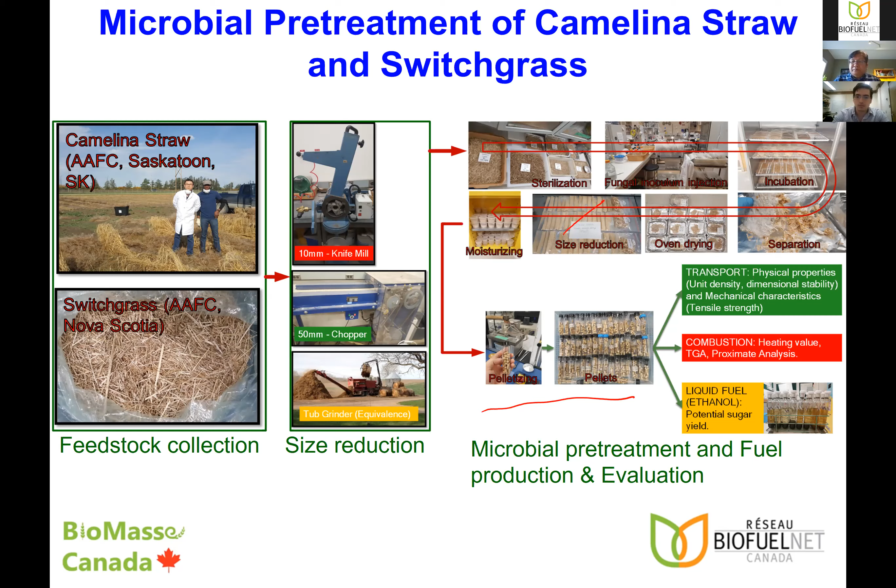So the results after pelletizing, if you see here, sorry about the crowded table, if you see the pelletized product here, it's the microbially pre-treated one versus the untreated one. And you will see from the appearance, it's darker, the microbially pre-treated one, indicating that it is denser and higher in tensile strength. Tensile strength is a way for us to indicate the durability of our pelletized product. So unit density, dimensional stability, and tensile strength, all these pellet properties improve significantly as a result of the microbial pre-treatment using Trametes versicolor. Two strains were tested, the M4D and the 52J.

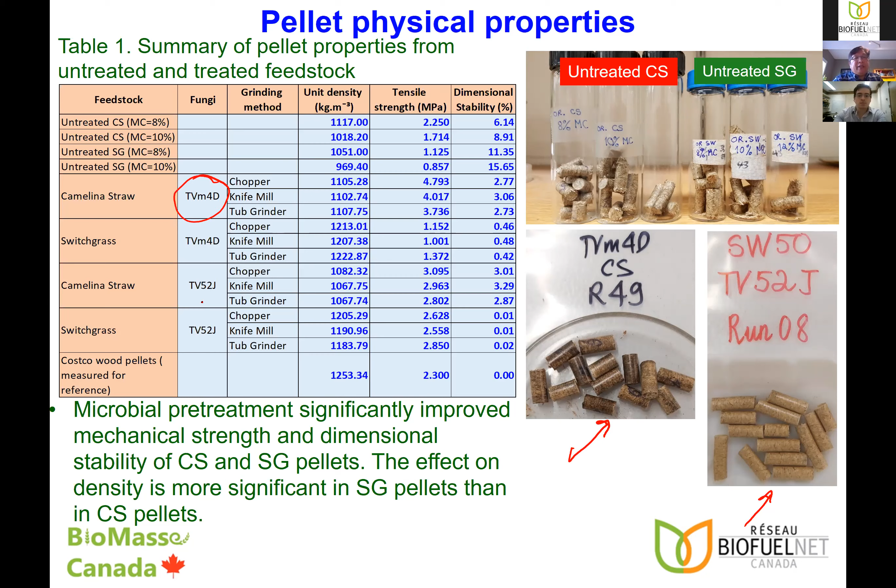And we were able to do some optimization for our microbial pre-treatment. So for example, if you want to optimize tensile strength, which is a good indication of pellet durability, we can do the microbial pretreatment at 88% moisture, 25 degrees Celsius, and 40 days. So you will see that a lot of this microbial pretreatment study had a longer pretreatment time. This long pretreatment time is an issue and can be combined with on-farm storage to solve this issue, and some engineering design in order to make this a low-cost process.

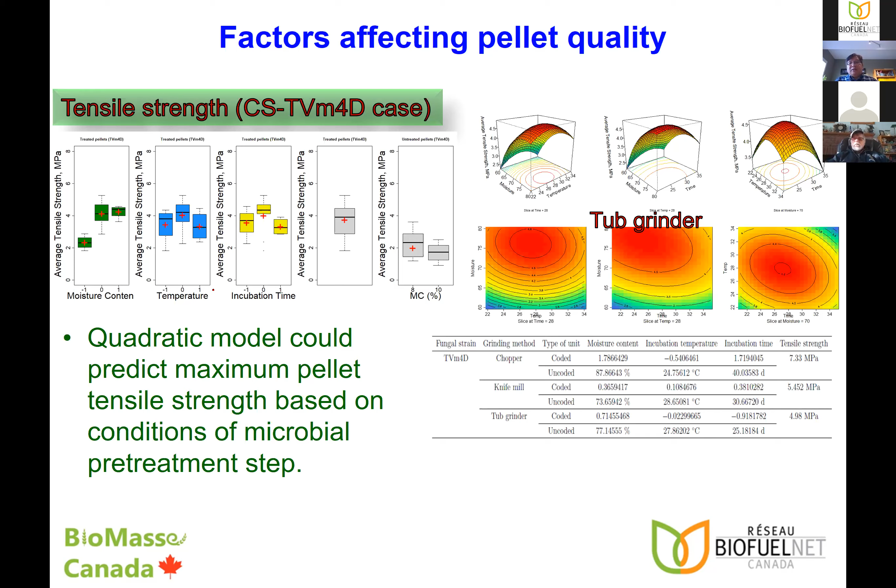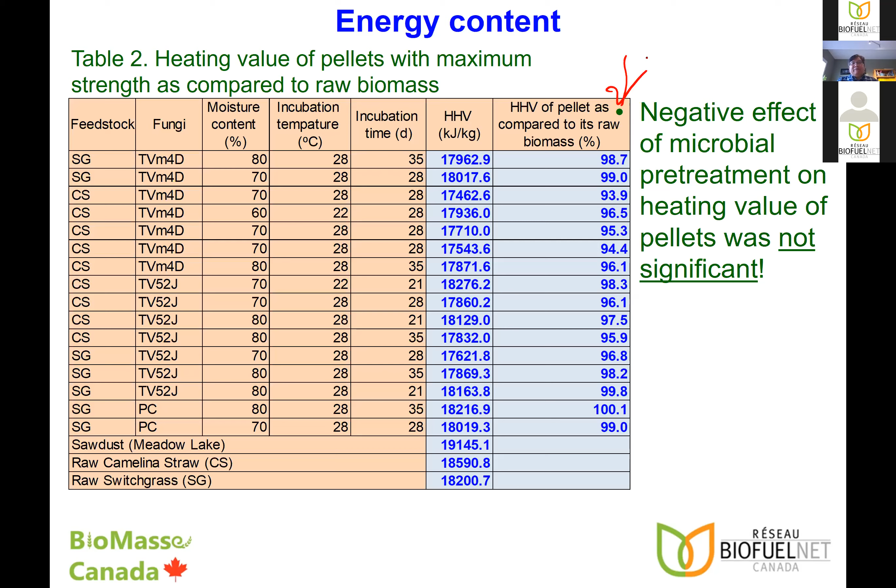And the heating value, the HHV of the pellets after the pre-treatment, as you will see here in this column, the higher heating values of the pellets of pre-treated as well as raw biomass were within 94 to 100% of the raw biomass. So therefore, the heating value of the pellets was not much affected by microbial pre-treatment.

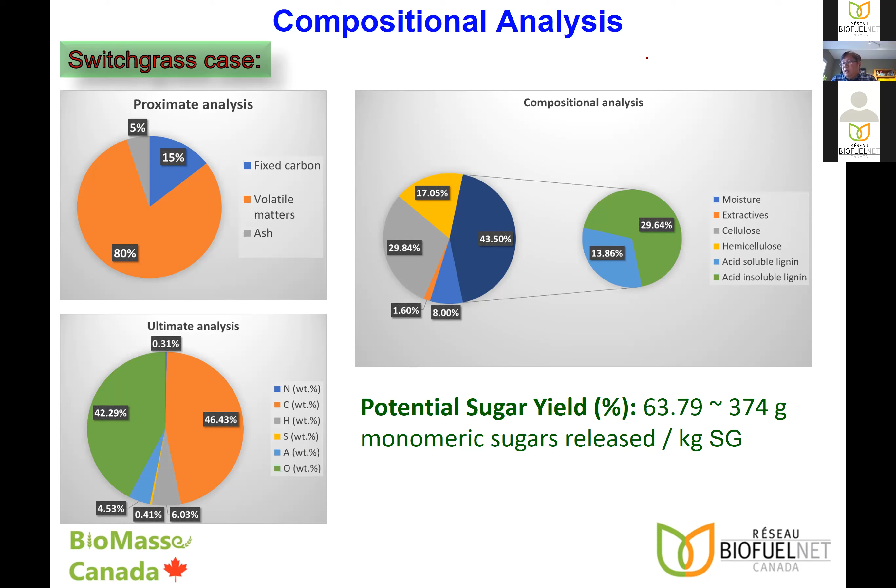In the switchgrass case, we can see that there is the combined effect: both camelina and switchgrass have a very promising potential for pellet production and for ethanol production as well. So we did some analysis of the potential sugar yield for switchgrass, and it was found at 64%, or 374 grams of monomeric sugar, which is a good index for ethanol production.

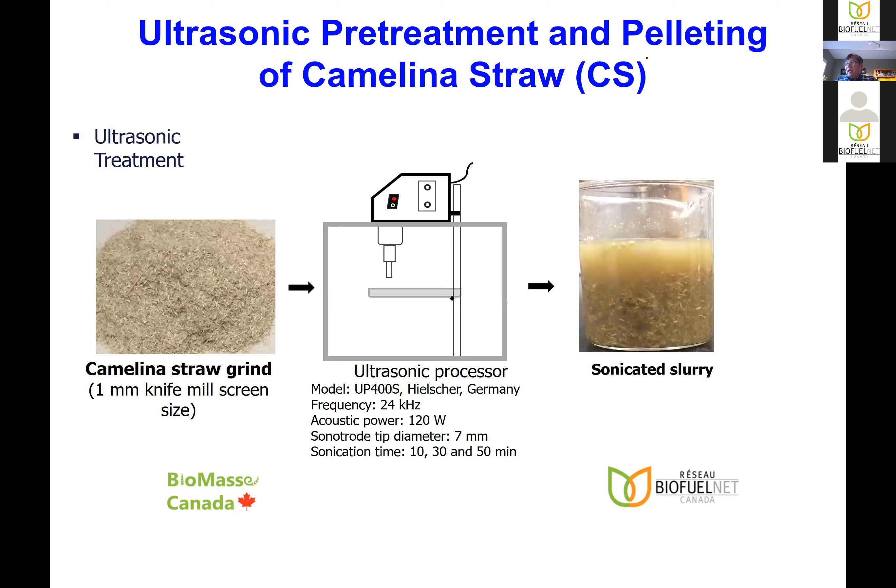Another treatment that we are looking at in terms of pre-treating the biomass is ultrasonic pre-treatment, and how it affects pelleting of camelina straw, where we're looking at ultrasonic technology to aid in microbial pre-treatment, for example. In this particular work we did with camelina straw, we sonicated the water and ground camelina straw, and then subjected it to chemical composition analysis. And you will see that the sonication time, the one in red, is a longer sonication time of 50 minutes. And of course, if you sonicate longer, the cellulose increased, and the acid insoluble lignin decreased.

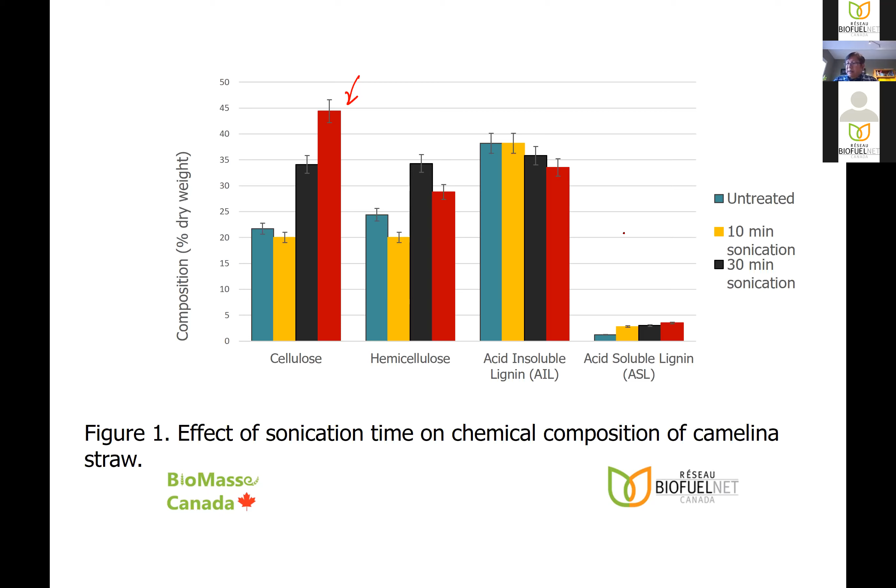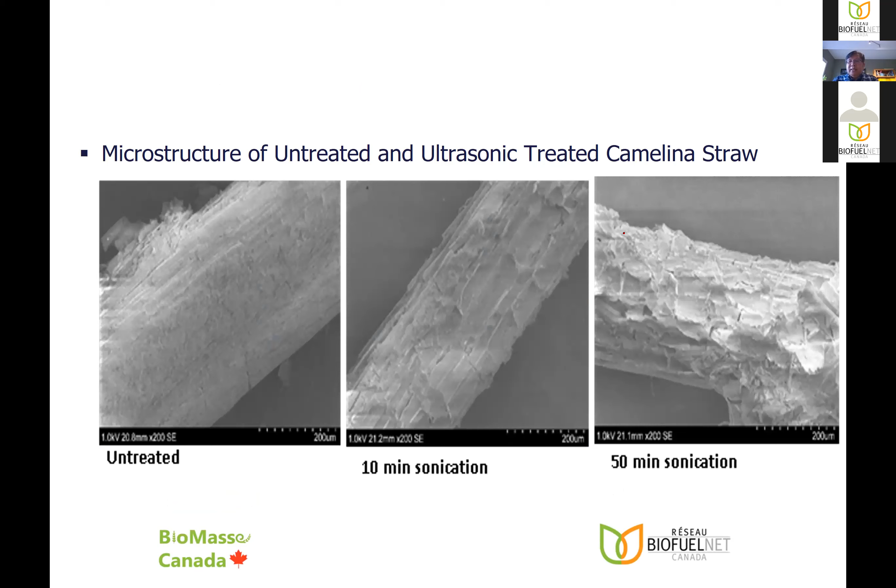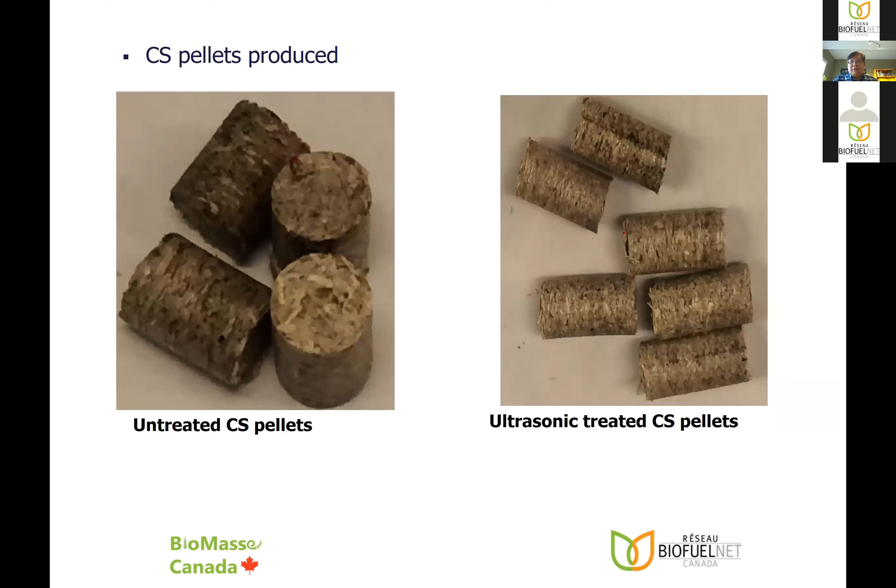And if you look at the structure, the SEM photo of this sonicated camelina straw, you will see that there is fragmentation and cavitation with respect to the length of sonication time. Shown in these slides are the pellets of untreated and ultrasonic treated camelina straw pellets. And you will see that there is an improvement: better durability index and better tensile strength was achieved for sonicated camelina straw pellets.

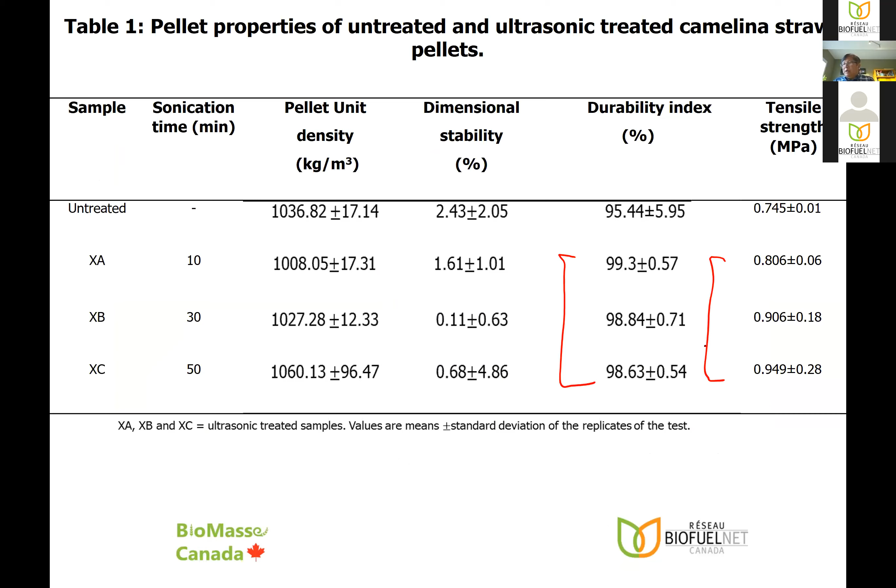Now, another pre-treatment that we have looked at is microwave torrefaction of switchgrass and camelina straw. And in this study, after the torrefaction, we used HDPE or high density polyethylene, which is recycled or coming from waste, and used the HDPE as a binder. The purpose of which is to manufacture biofuel pellets using a combination of torrefied biomass and HDPE for pelletizing.

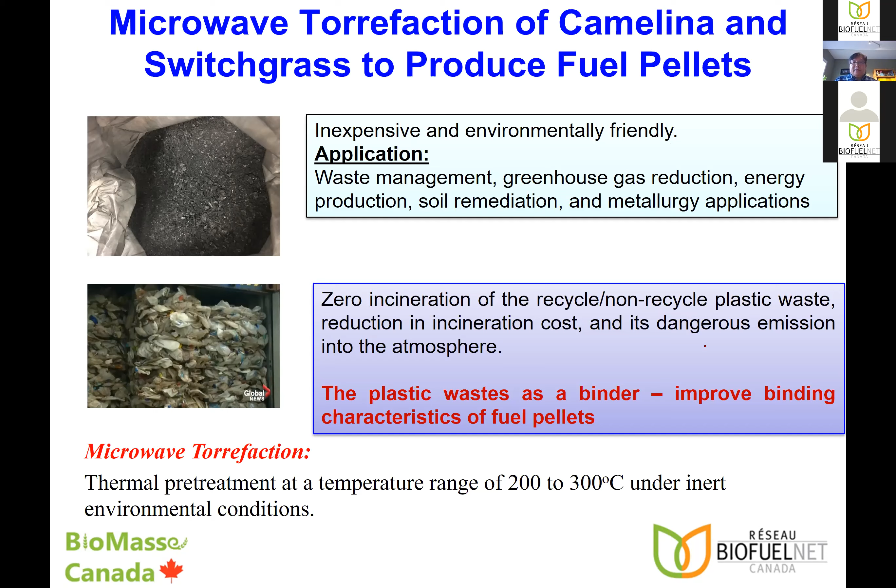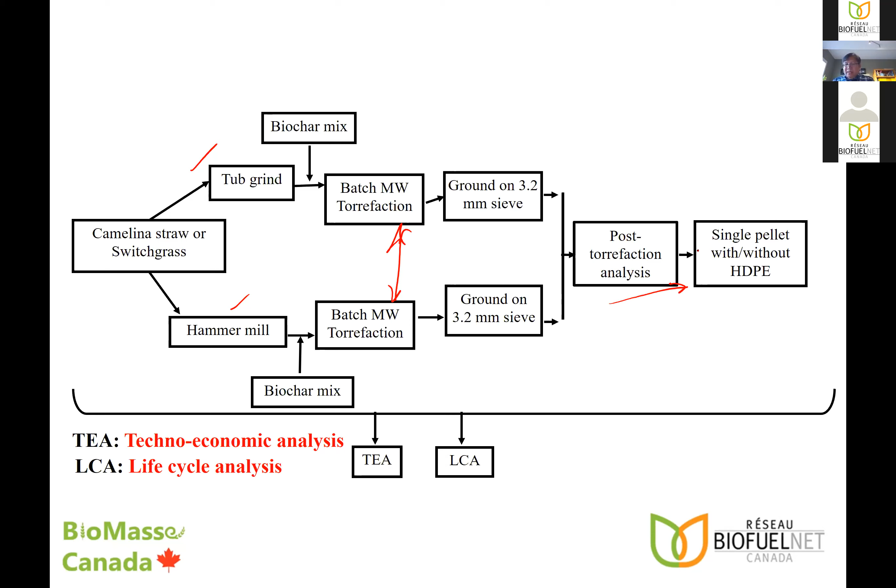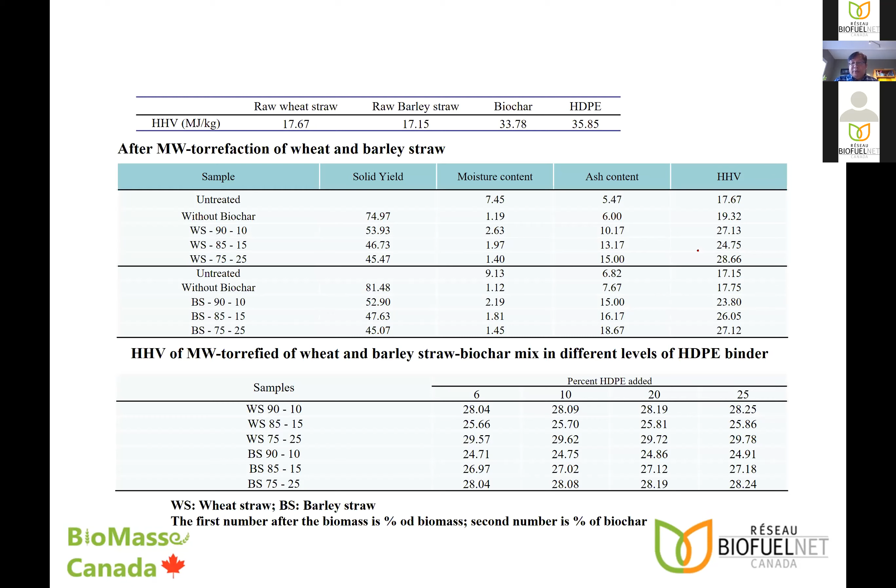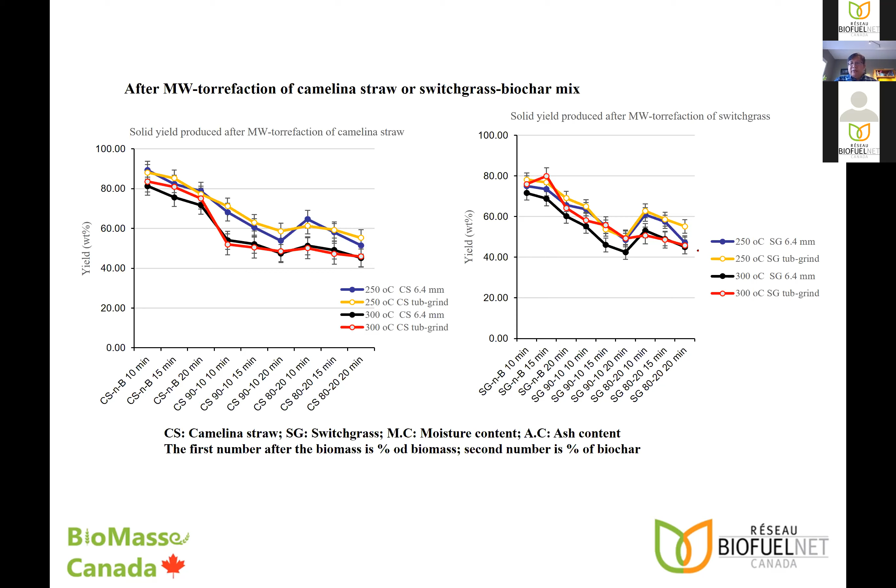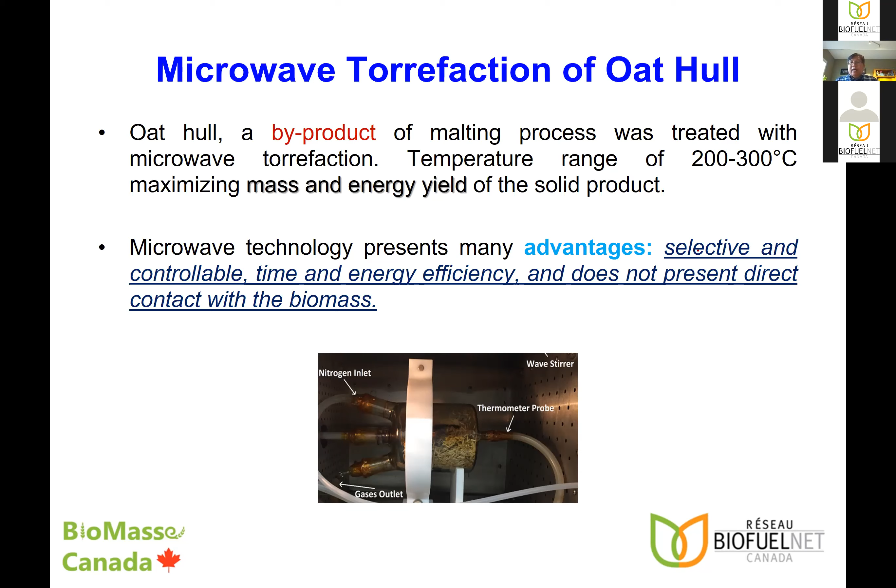And then we have also completed the microwave torrefaction work of oat hull, which was just defended by Esteban before Christmas. We are working with Richardson Milling on this experiment, wherein we use microwave technology to torrefy oat hull at different temperatures. We have the oat hull material here, and we torrefied it at three temperatures: 225, 255, and 285 degrees Celsius.

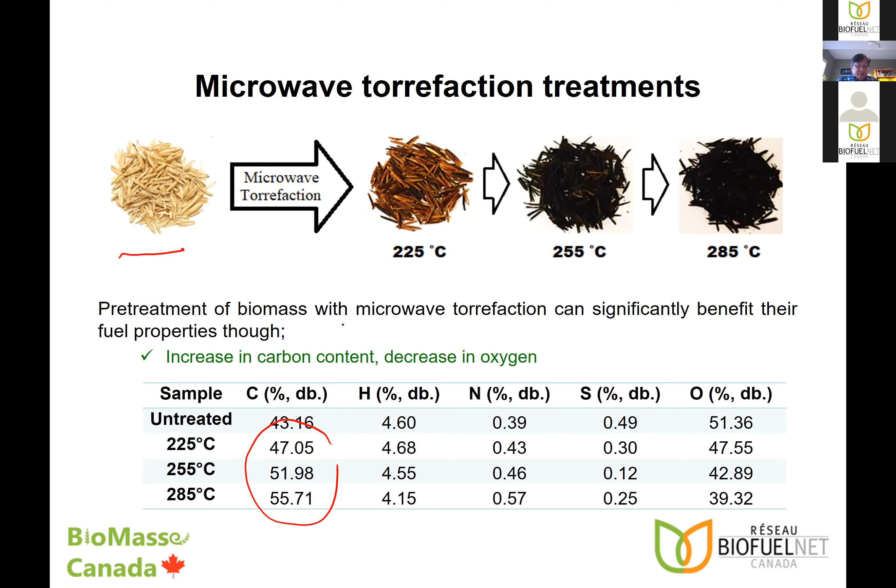So microwave torrefaction can significantly benefit the fuel properties of our biomass, as you will see in the increase in carbon content with respect to the temperature used in torrefaction. In terms of grinding energy, we have seen a 64 to 86% energy reduction in grinding, and of course lower moisture absorption and lower hygroscopicity. You will also see here the hemicellulose, cellulose, and lignin content, and the calorific value of the biomass resulting from the torrefaction process.

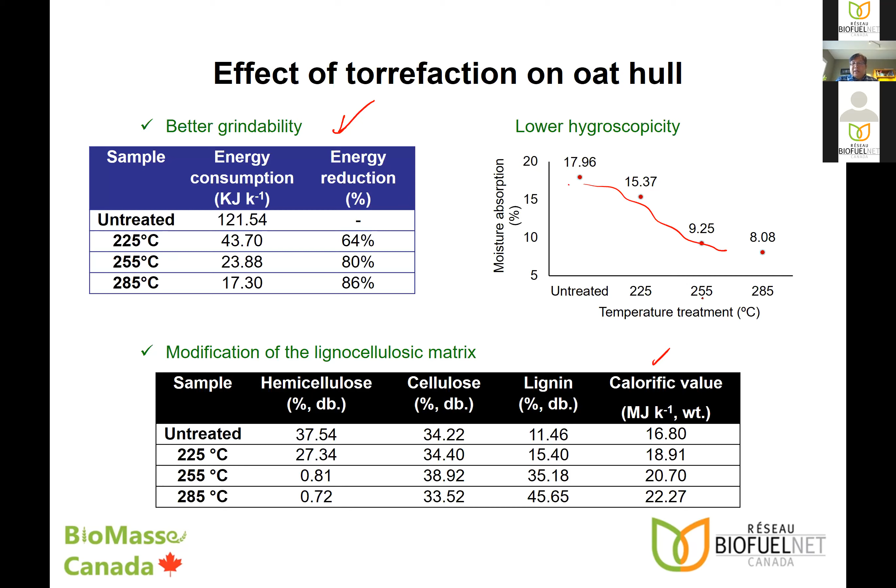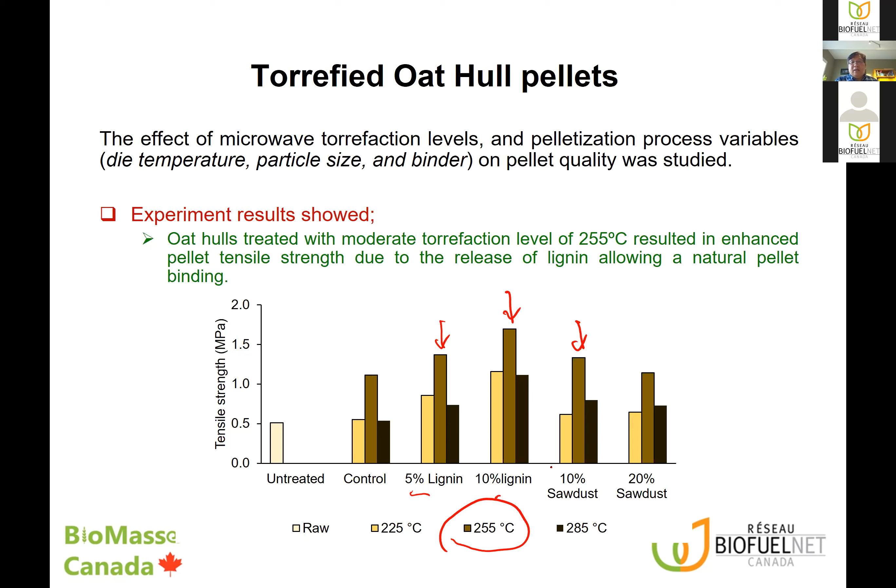And we did pelletize the torrefied oat hull. From this work, we can say that torrefaction at 255 degrees Celsius was a good option. This curve shows that the tensile strength was very good for this temperature. We also tested lignosulfonate, 5%, 10%, and also sawdust in the process. At high torrefaction levels, tensile strength and pellet density were negatively impacted by the treatment. The use of lignosulfonate as binder decreased the calorific value of moderate and severely torrefied pellets. High die temperature should be put into your pelletizing equipment so that we can successfully pelletize the product.

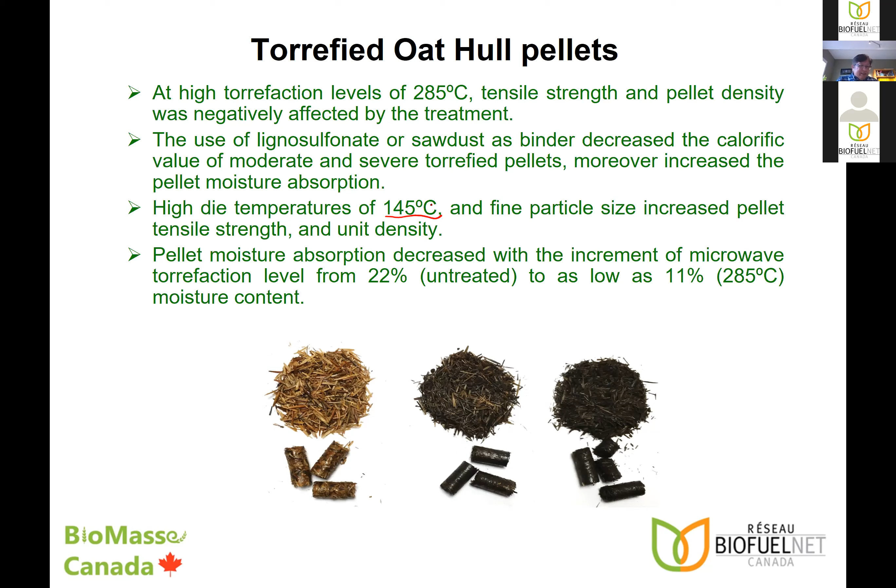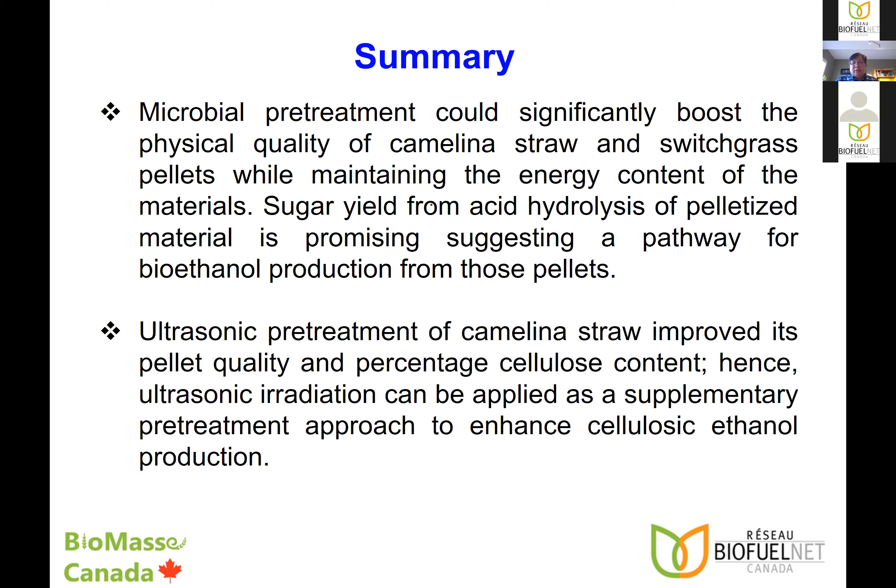So just as a summary, microbial pretreatment could significantly boost the physical quality of camelina straw and switchgrass pellets while maintaining the energy content of the material. Sugar yield from acid hydrolysis of pelletized material is promising, suggesting a possible pathway into bioethanol production from these pellets. The ultrasonic pretreatment of camelina straw improved its pellet quality and percentage of cellulose content, because the ultrasonication delignified the biomass. So it can be applied as a supplementary pretreatment approach to enhance cellulosic ethanol production.

And microwave torrefaction of the biomass biochar mix has shown to be an efficient treatment technique with plastic waste blend using the densification process. Thus we have high quality fuel pellets for biomass energy. And lastly, microwave torrefaction of oat hull increased the pellet strength at moderate torrefaction level. We found that 255 degrees Celsius torrefaction temperature was optimal in this process.

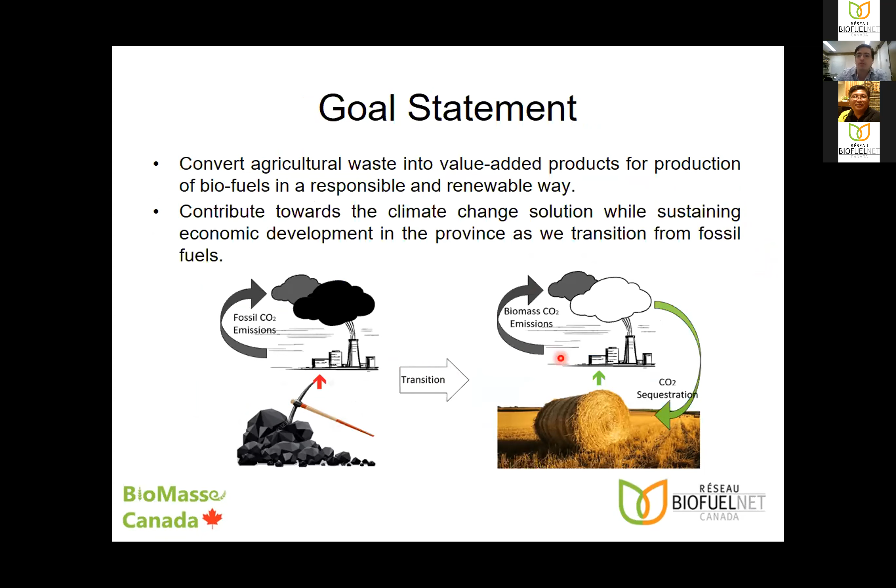For the project overview, we have to determine the techno-economics of the microwave torrefaction pellet plant using oat hulls as the primary feedstock in the province of Saskatchewan. Moreover, we have to determine the plant capital cost, the operation cost, size and location, and do financial analysis.

So first of all, here's a short description of what microwave torrefaction is. It's basically a thermochemical process where biomass is heated to a temperature range of 200 to 300 degrees Celsius. And this treatment is going to benefit the biomass fuel properties. So with a temperature of 255 degrees Celsius, which is moderate torrefaction, we can increase the heating value of our oat hulls from 16.8 to 20.7 megajoules.

We can see a reduction in the moisture absorption of our pellets. From the raw pellets of oat hulls, we have 22% moisture absorption. And with the treated pellets, we have 12% moisture absorption. This is really important because the more water that we have in the pellet is going to lower the heating value eventually. And also it's going to increase the transportation cost because we have to move the weight of the water as well.

Moreover, we have a better biomass grindability. We're decreasing the grinding energy consumption, with an 80% energy reduction with this treatment.

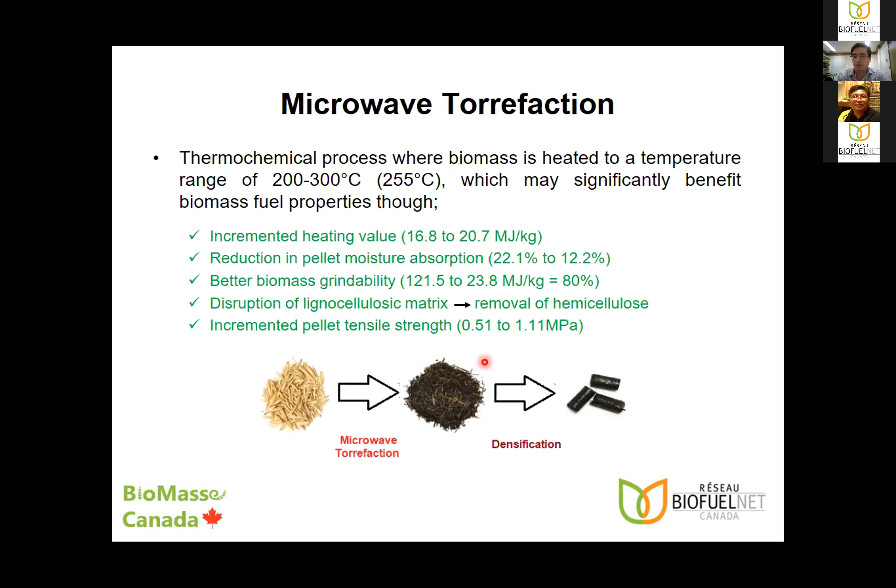I would like to comment that for the microwave torrefaction process, our main product is the mass, which is 70% mass yield. But we also have a couple of other byproducts, which are the liquid fraction and the gas fraction.

From the liquid fraction, we have mainly water. We have a lot of chemicals as well, over 400 different chemical compounds, which are mainly classified into phenols, which give the flavor and the smell of smoke. We have carbonyls, which give the color, the brown coloration that we can see here. We have some acids, mostly acetic acid, and we have some tars, which I will explain later on.

We also have the gas fraction, which is mainly carbon dioxide. It's also composed of carbon monoxide, and we have some other smaller gases such as hydrogen.

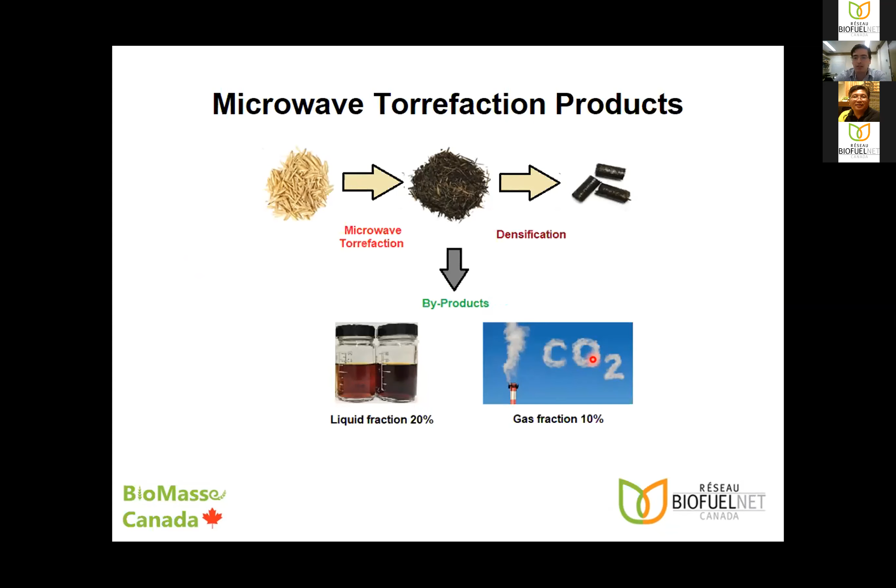For the techno-economic analysis, this is a methodology to analyze technical engineering design and economic evaluation of a process, product, or service. For this project, we evaluated the construction of a small-scale torrefaction plant, incorporating costs, benefits, uncertainties, and timeframes. This analysis was undertaken using the SuperPro Designer software.

Now, for our techno-economic analysis, we decided to explore two paths. The first one is the commercialization of torrefied pellets only. And for path number 2, we have the commercialization of torrefied pellets and the production of liquid smoke.

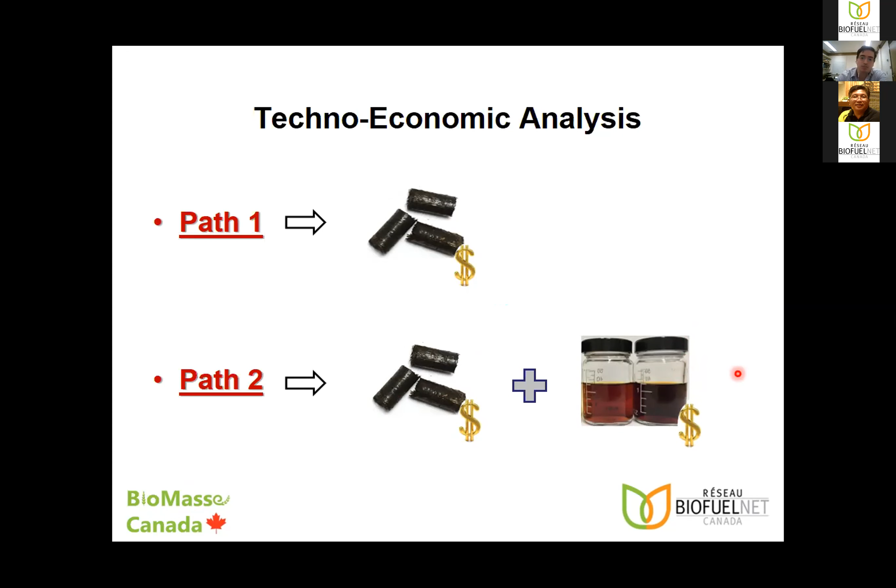So from the liquid yield, we can filtrate the liquids in order to reutilize it as liquid smoke. This is a really valuable product in the food industry because it gives the smoky flavor and color to food products. So if you ever purchase smoked turkey breast or smoked cheese, there's a really high chance that they are formulated with these liquid smokes. The reason for this is because they are much cheaper than traditional smoking houses, and we have a higher homogeneity of the product. So we have our process flow diagram for path 1.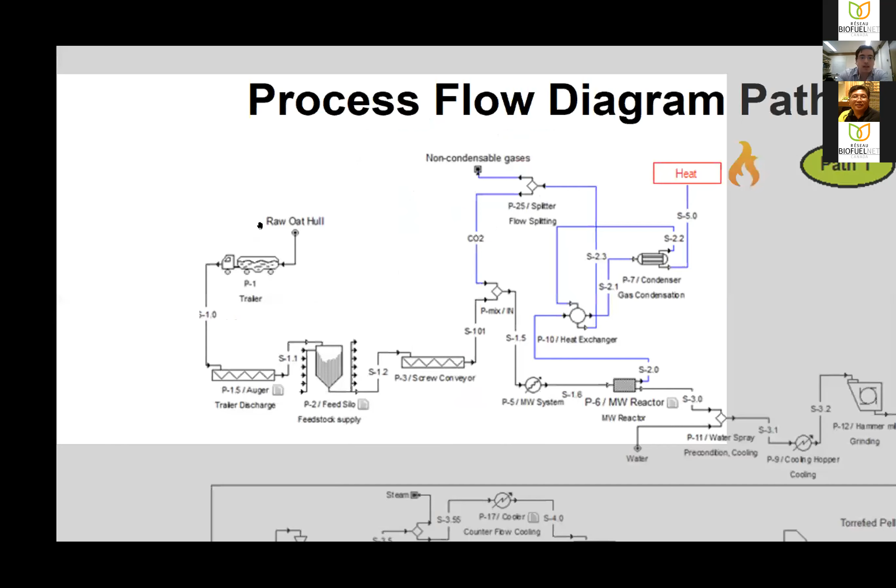As you can see here, we have the transportation of the hulls from the source of the feed, in this case a mill, to our plant. So we have a feedstock silo. From the feedstock silo, we have to move the product to our torrefaction system.

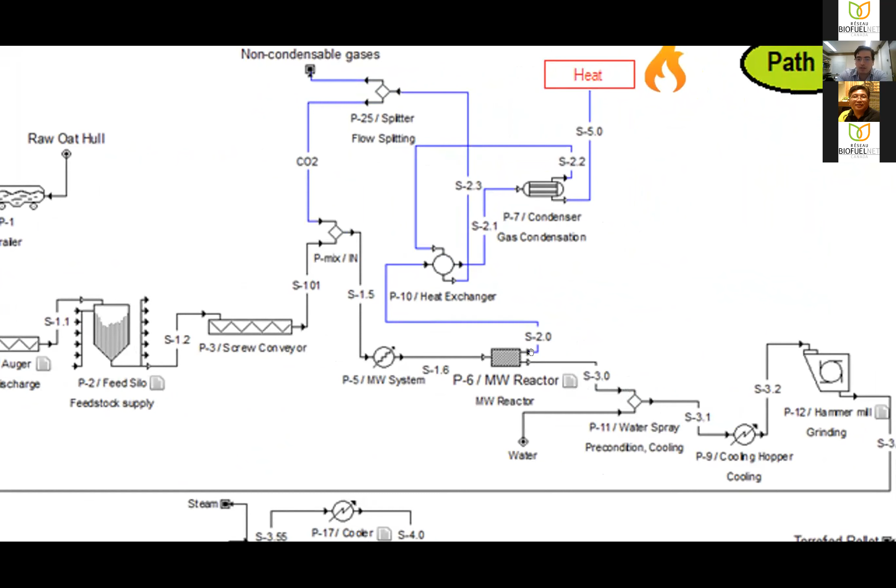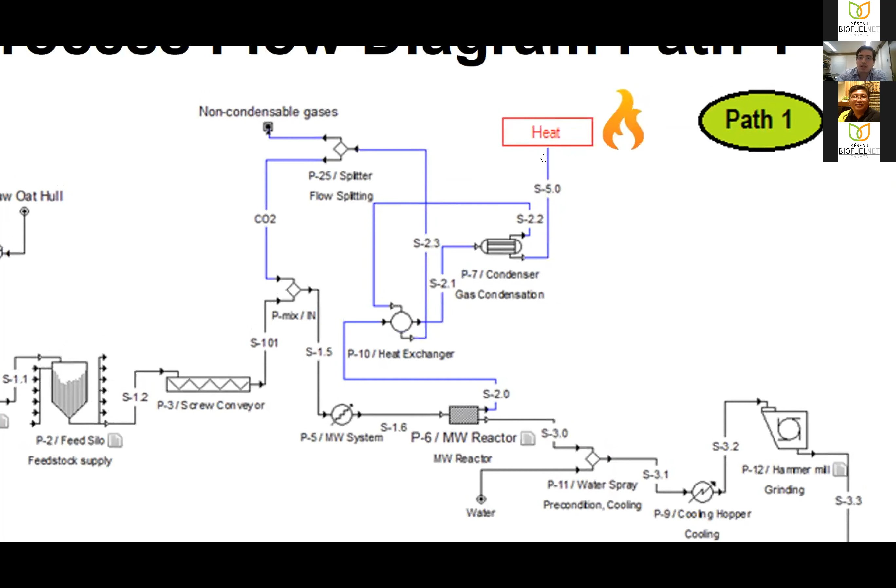After the torrefaction system, we're going to have two streams. The top one is condensable and non-condensable gases. These gases we can separate in a condenser, separating the liquid yield, which we can later use for heat production. We have the non-condensable phase, which is mostly carbon monoxide and dioxide, as I was mentioning, which we can recirculate into the system to maintain an inert environment.

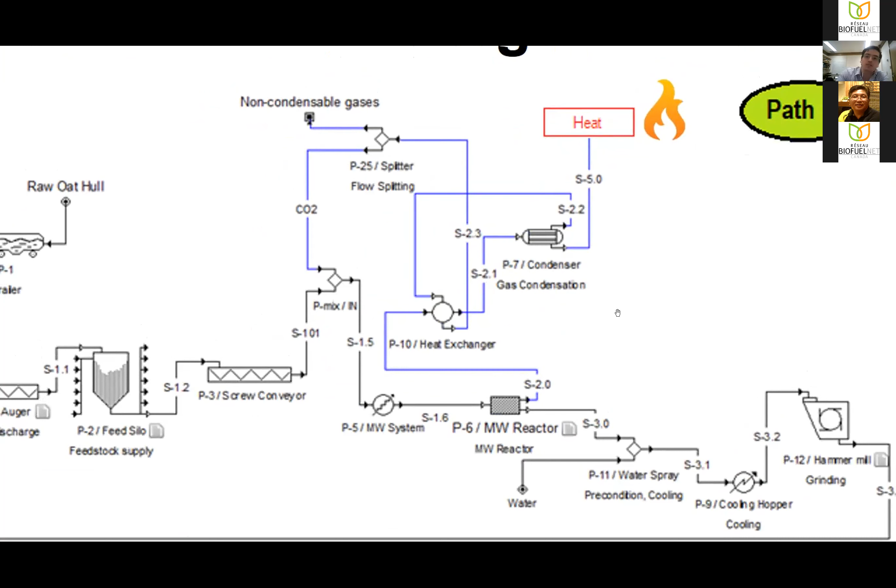This is important because if we have oxygen in our system, we're going to have a higher loss in mass. And remember, we want to keep or get the most pellets possible.

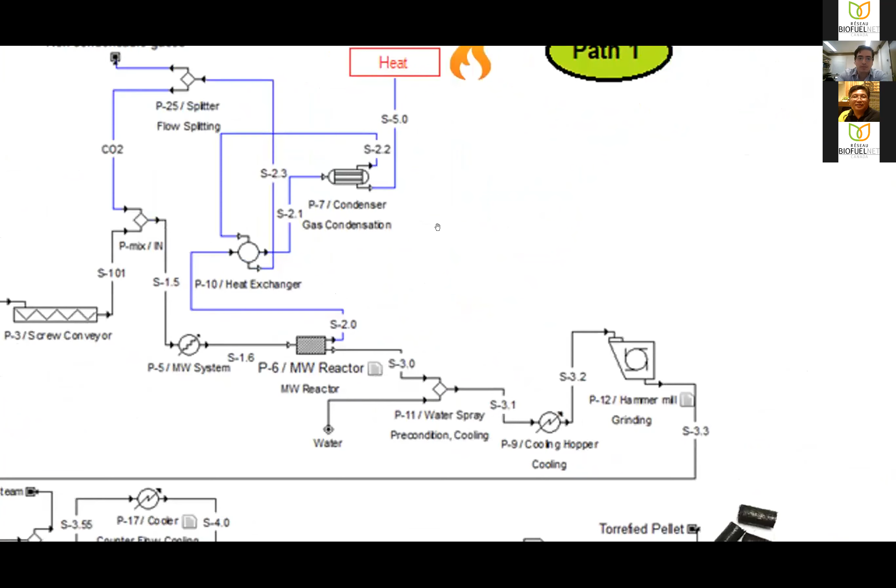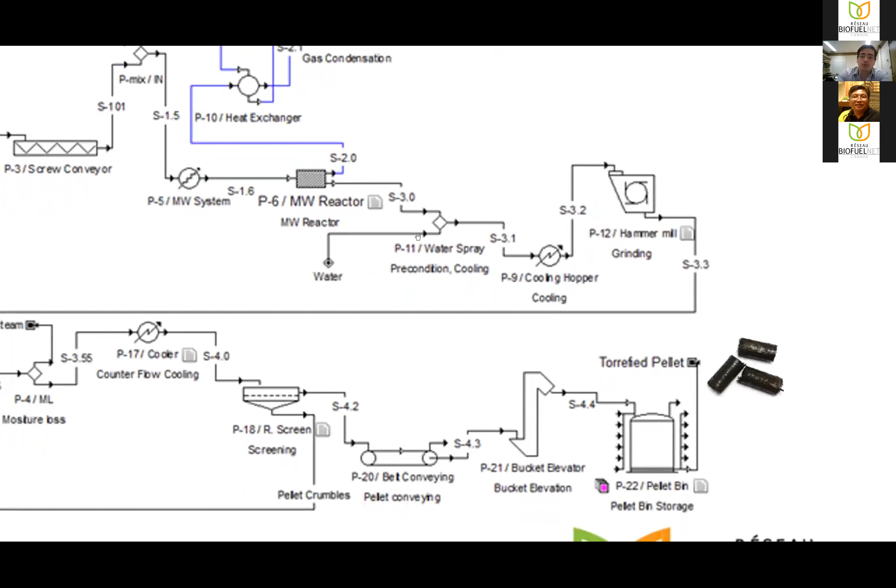After, on the bottom stream, as I mentioned, is the mass flow. After torrefaction, we have to cool down our mass because it's really dry, really hot, and it can self-ignite. So we have to cool it down. After cooling down, we have to grind it prior to pelletization. Here it's important that we have that reduction in grinding because it's energy savings.

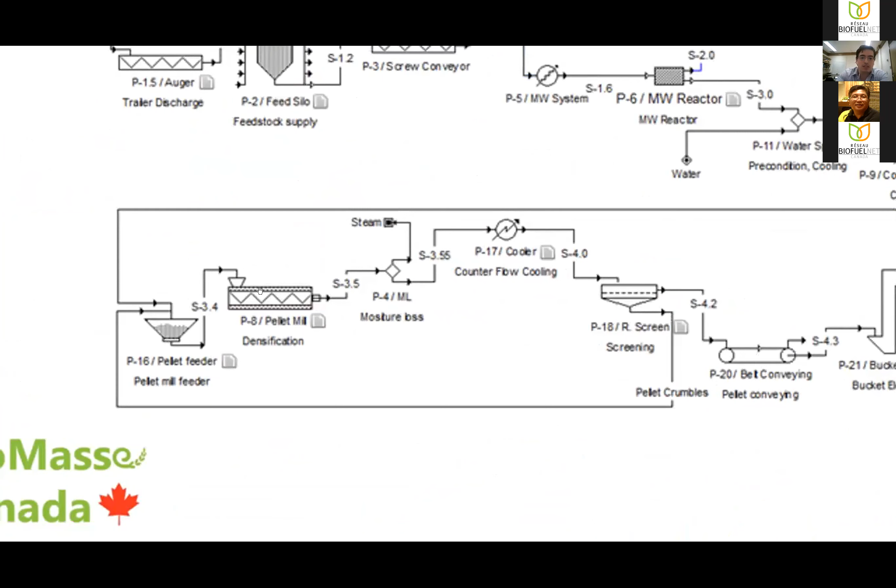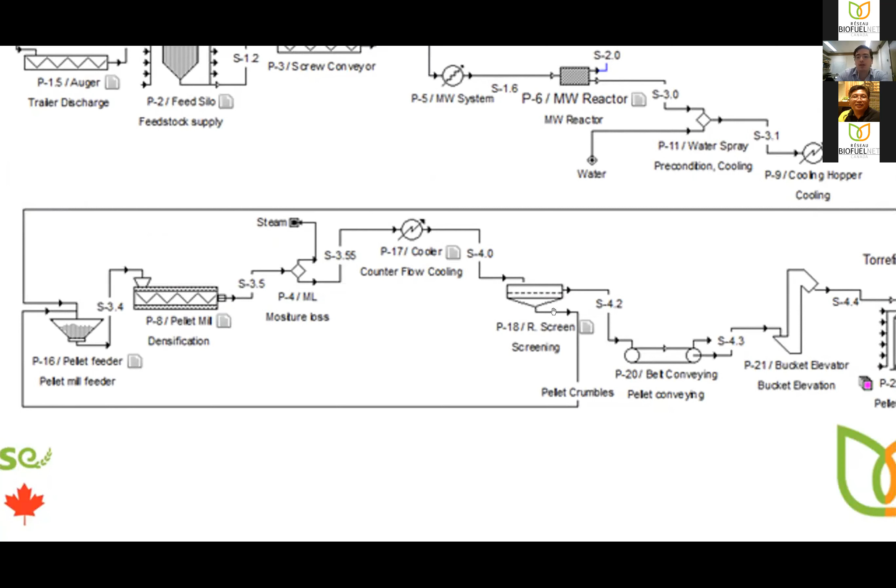After the grinding, we take our mass to the pelleting system. From the pellet mill, we have to cool down the pellets again because they may self-ignite. From the cooling, we have a screen mainly to remove some fine particles or undensified pellets which can generate dust. So after removing those, we can transport the pellets to our trailers or pellet bin storage silos.

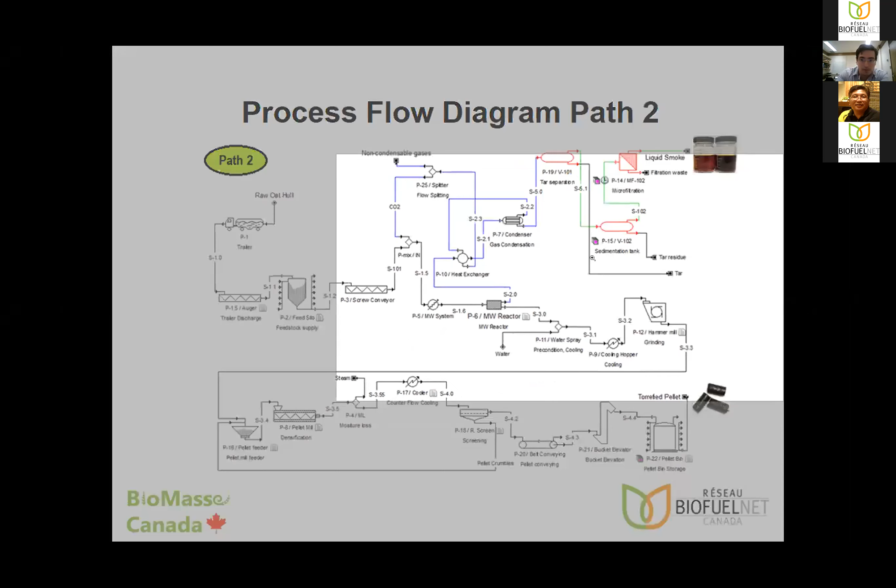So for the process flow diagram, path 2 is exactly the same path. However, on the liquid fraction, we added some equipment to filtrate and remove the heavy tars. So we have some sedimentation tanks. These tars will eventually condense after 10 to 15 days.

And it's important to remove them because they have some hazardous compounds like benzene or toluene, which are a cancer risk for humans. And after the sedimentation tanks, we have a filtration unit, a membrane, to furthermore eliminate any risk of these tars being present in the smoke.

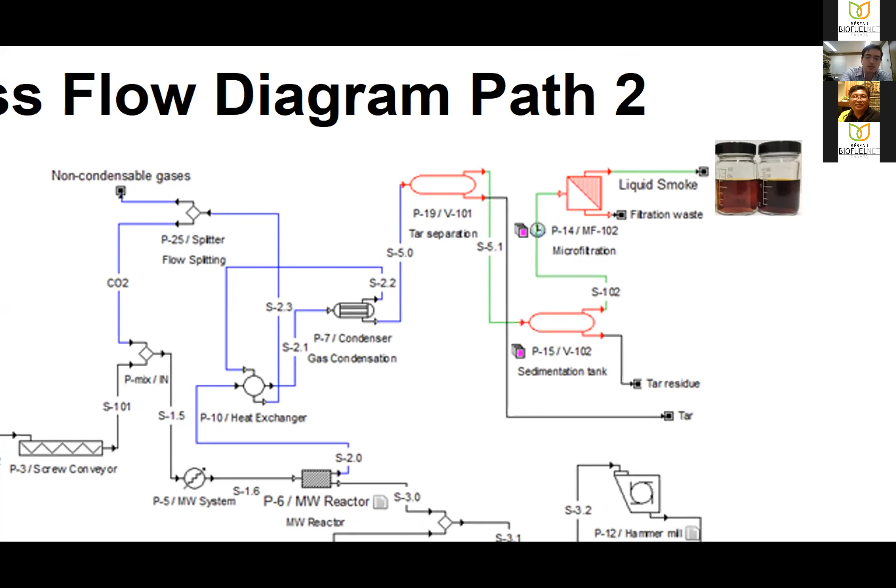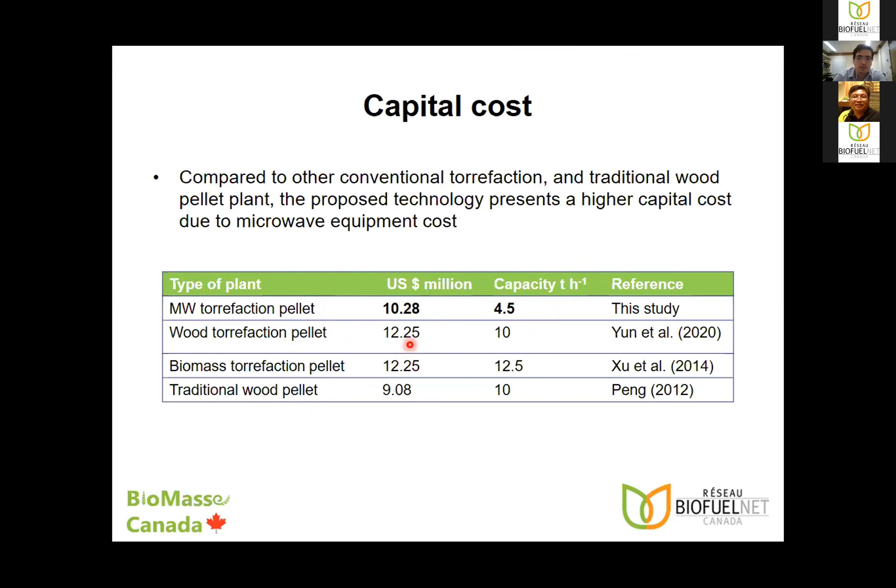We also have the power demand. We have a breakdown of electricity consumption to produce 1 ton of torrefied pellets, and we estimate almost $40 to produce 1 ton. The most expensive source of energy consumption is the microwave system, which utilizes more than 50% of the electricity consumed. After that we have the pellet mill, and then a general load consumption.

Which is mainly the kilovolt amperes. As we know, when using electricity we have to pay for the kilowatt hours and for the kilovolt amperes, so it's kind of like a glass of pint. I would like to explain it like this: if you have a glass of beer, the beer is the kilowatt hours and the kVA is the foam at the top. Even though you're not actually drinking it, you have to pay for it.

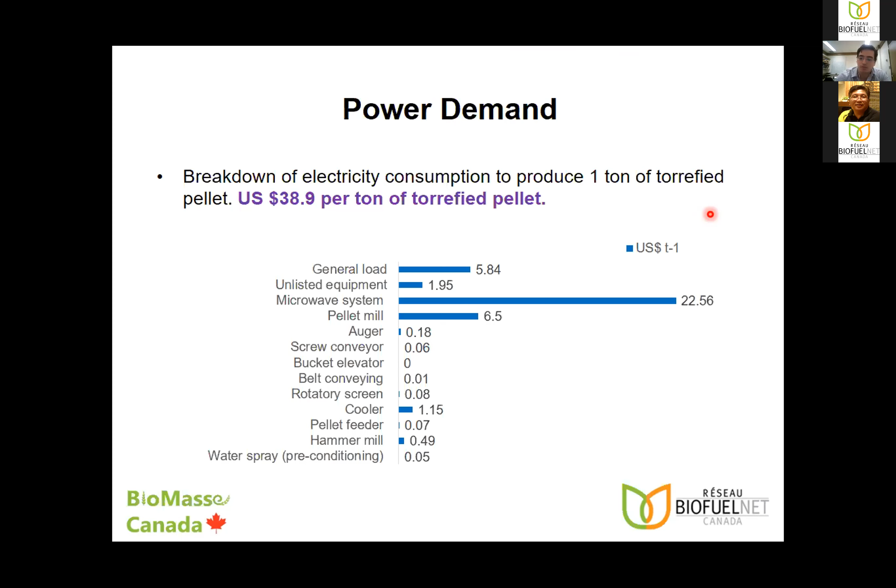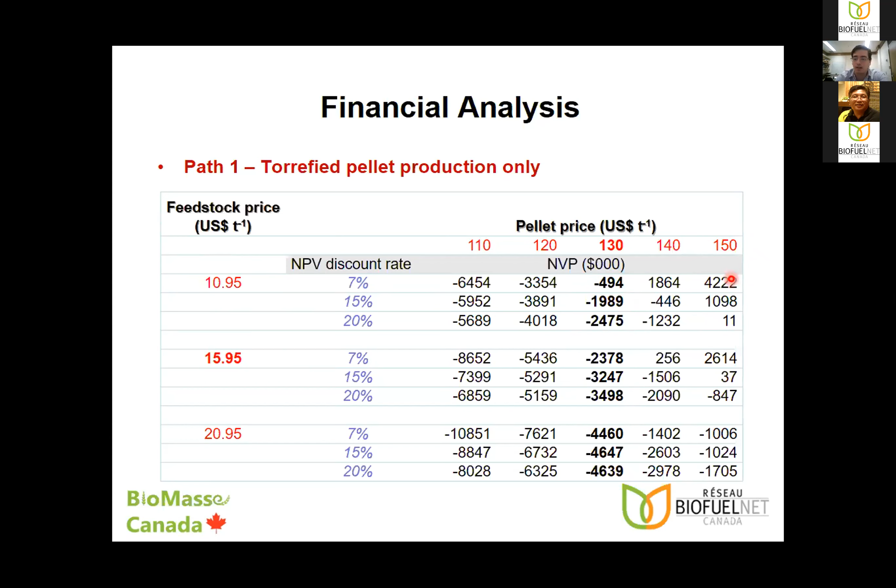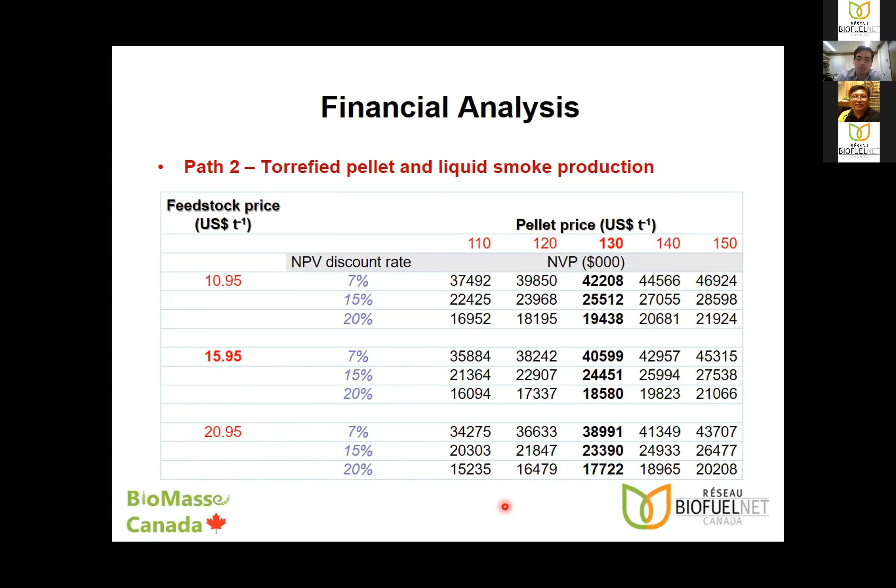For path two, we have the selling of the pellets and the selling of the liquid smoke. Again, it's the same exercise as the first part, but we can see positive net present values in all of them, even though we have a really high feedstock price, a really high net present value discount rate, and a really low torrefied pellet selling price. We still have a positive factor, which tells us that it's going to be a good investment if we do it.

So for summary, we have that industrial microwave systems present major advantages in terms of being compact. They are up to 1/5 the size of traditional heating equipment. They are faster, more controllable because we can stop them anytime that we want, and they're better than conventional heating methods due to faster processing time.

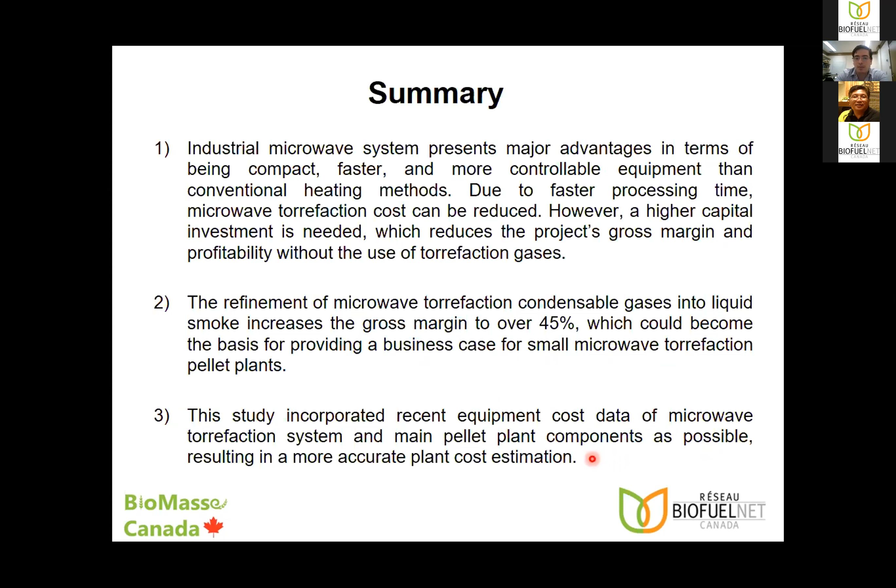Microwave torrefaction costs can be reduced. However, a higher capital investment is needed, which reduces the project's gross margin and profitability without the use of other byproducts like liquid smoke. From the refinement of microwave torrefaction, condensable gases into liquid smoke can increase the gross margin, which could become the basis for providing a business case for these types of systems. Lastly, we have incorporating the recent equipment cost data from microwave systems and pellet plant components as possible, to have an accurate analysis. Thank you very much.

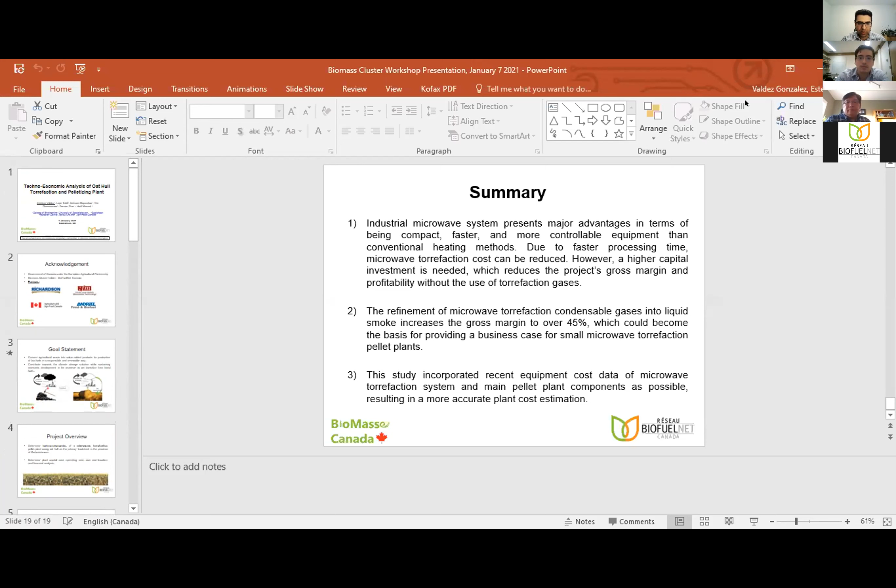Okay, thanks a lot, Esteban, for the detailed information on your techno-economic analysis. We have two questions from Maria. She's asking mainly about the capital cost - the capital cost for what size of plant - and also the assumption of the price of pellet that you considered in the analysis of your internal rate of return.

Oh, great. So the size of the plant is 4.5 tons per hour of torrefied pellets.

Okay, and then you mentioned you showed some data on the net present value, so I saw that you assumed different prices of pellet and also liquid smoke. Can you mention those prices again? Yes, so the assumed price of the pellets is $130, and for the net present value we played with them from 110 to 150. And for the price of liquid smoke, I put it at $1 per kilogram.

I consulted with companies that utilize this liquid smoke, and they told me that the price range is from $2 up to $10 for 1 kilo. So I think it's justifiable to put those prices there.

When you say price of pellet, is it the price at the gate of the pellet plant or the price delivered to the end user? Oh yes, this is important - it's the price at the pellet gate, yes. Oh okay, so it doesn't include the transportation, the storage, handling is not included. No, it's not included yet.

And one more question from me - for the liquid smoke, do we have any existing application for it? Oh yes, for sure. Within the food industry, they utilize it a lot for providing a smoke flavor to food products, so for hams or cheeses or bacon, it's really commonly used.

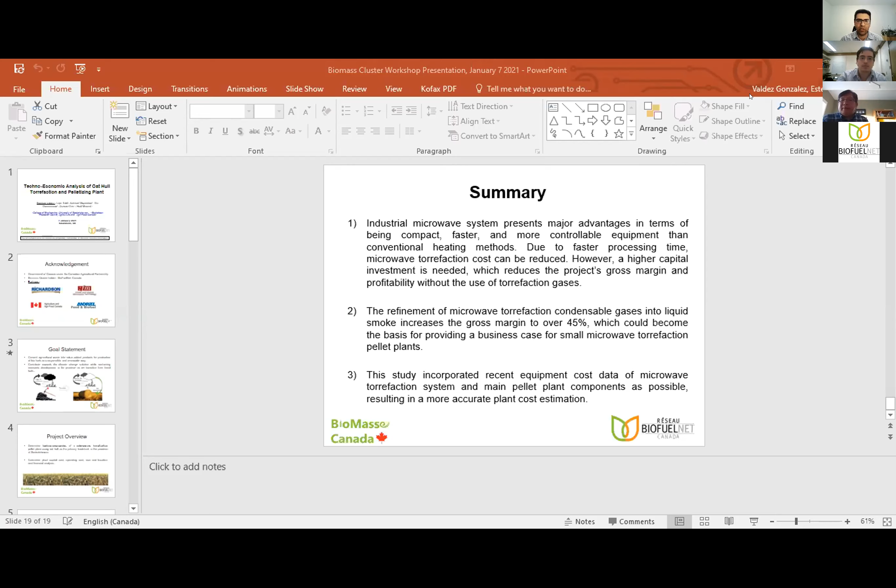Okay, great, and I don't see any more questions, but Lope, I have a question for you regarding commoditizing agriculture biomass. You and also Stepan talked about different pathways for pre-treatment, pre-processing. Which of these pre-processing and pre-treatment methods do you think is going to be more promising in the near future to make agriculture biomass like a commodity, or at least a product that can be sold in different markets, similar to wood pellet for heat and power generation?

We're looking at torrefaction and this microwave technology. Also looking at whether we can use conventional heating for torrefaction. That way, this can be used for combined heat and power type of applications.

We know that torrefied product has much higher heating values, and of course, with that, I would say the pellet costs should be looked at, because the one that Esteban has looked at was more into the wood pellet type cost with a lower heating value. So if you have a heating value of, let's say, 24, 25 megajoules per kilogram, I think that is a better selling point, and also a higher price for the pellets.